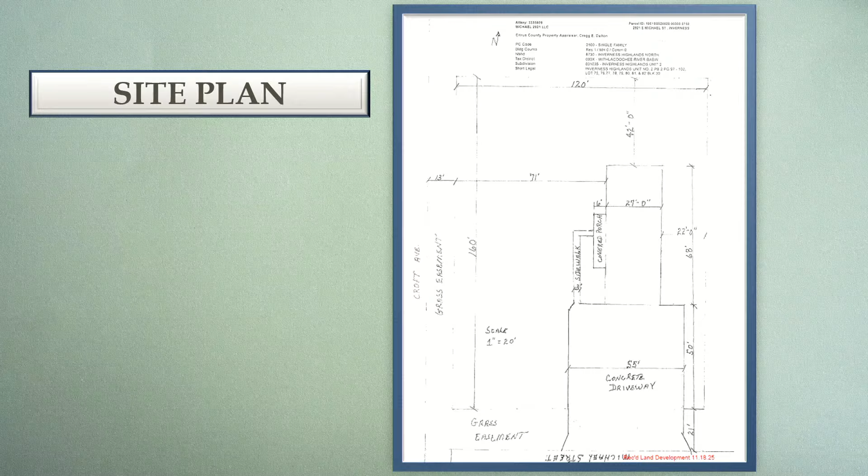So we asked technical services, our engineering, to comment on that, and it was their opinion that it is larger than that which is allowed, and they've offered information about the standard size and the allowance to go larger if there are stormwater compensations. The max they stated was 36 foot in the right-of-way apron for a driveway, and the last permitted driveway they know of was 12 foot. So there was an enlargement at some point in time. I believe the site plan shows a 55-foot driveway currently.

Okay, so staff's recommendation, technical staff recommendation, would be during a permitting process, a condition of a permit would be to reduce the apron width. Correct, that would be part of the site review. When this gets permitted, they're going to look at the site, things like landscaping, parking spaces, handicap spaces — all of that's part of that site review for the change of use.

And if it exists now, is there a reason to change it? If it exists now and wasn't permitted, then yes, there is a reason to change it. Got it, thank you. Any other questions from the board?

Yeah, Commissioner Chair, Mr. Barmes? Isn't this kind of untypical, to have a seller of a property come in and ask to change the status in order for him to sell it to an attorney's office or whatever? This is not the typical way that we do this, right?

I would say that it falls within the scope of the owner of the property positioning for an application to allow for a different use. It seems like they have a plan to sell it to an end user, and they're trying to stay above the sale and make sure it is sold with the allowable uses that are part of what they're trying to do there. But it is the owner that's here asking for the application, and I feel like that is appropriate.

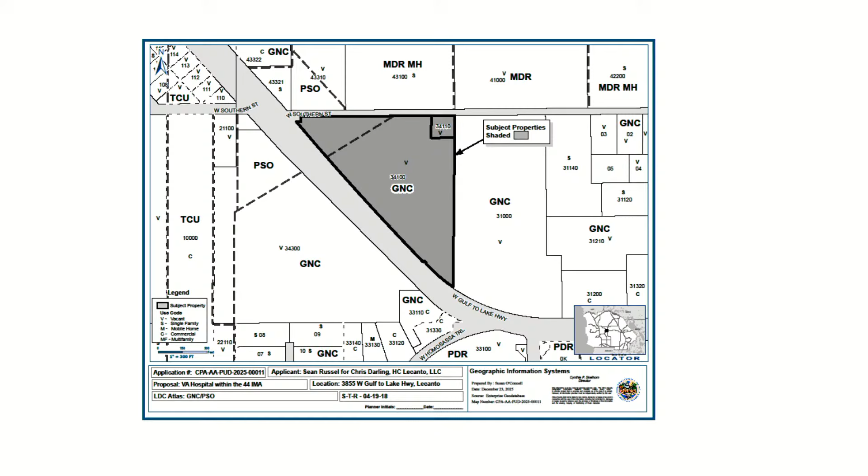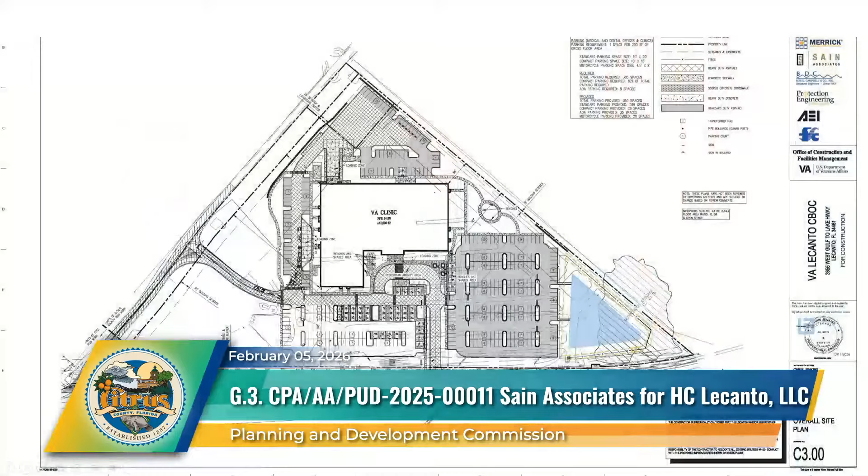I have a couple. So, have you guys ever tried to make a U-turn at the light at 44 and Homosassa Trail? Have you tried to make a U-turn yourself - let's say in a GMC truck - right at that intersection? I have. And did you make it without running up and over the curb? Oh yeah, yes sir. I go to that light constantly, I live within a mile of that area. I've watched a lot of people not make that curb. So when you tell me an 18-wheeler truck is going to make a U-turn right there, I almost want to laugh and fall out of my chair. I know that's not going to happen.

Well, FDOT would disagree with you. I 100% believe that, because FDOT does a lot of things I don't agree with - the mess they created at Crystal Oaks Boulevard and 589 and this whole entire area, it's a disaster. Well, we do know the parcel adjacent to us - we attempted to acquire property from them in order to have an entrance here. They would not go for it. It's a church on the property, they're not doing anything with it. We spent the better part of two years trying to convince them to sell it, or a portion of it. We even offered to put in the driveway and allow it for their use, and they refused. So when we permitted with FDOT, all we're doing is exactly what they asked us to do.

They asked us to do a traffic study on eastbound traffic, westbound traffic, the feeders, the daily trips, all those things, and they concluded what you see here is the plan that FDOT is planning to approve for that.

Yeah, I understand that, but I'm just here to tell you as a resident of this community that intersection is poor. And if you guys care about the veterans you are trying to bring into the facility, you really need to study, and I suggest you do something different with access, especially along the eastbound traveling on 44 right there, you will not get a U-turn and maybe one car at that particular light. It's just not wide enough.

And then as far as accessing off of the adjacent property, that kind of sounds like cross-access to me. If you're trying to purchase another piece of property or a portion of it, that's cross-access. So in my opinion, cross-access is important. I don't agree with the deviation. I won't vote in favor of it. You guys have a blank slate here that you can design. Cross-access doesn't mean that they're driving through your parking lot.

Cross-access just means at some point on that particular property, you need to provide access to the adjacent commercial properties. And I think it's very important in Citrus County right now because you can see the areas up in the Lecanto area. We've been pushing cross-access, not recently because mostly everybody understands it now, but 10 years ago, cross-access was highly contested in a heated debate. Now, people that drive around in this county who understand and utilize these cross-access ways understand how important they are. So I believe that you can design this 13 acre parcel, right?

I don't disagree with you, but we're between a rock and a hard place between what FDOT is dictating within their right-of-way and getting into this site physically. Y'all are telling us you want one thing, and FDOT is requiring something else, and we can't satisfy both of you. We've done the best we can adhering to their requirements by doing traffic studies, daily trips, number of patients seen, number of employees, when they arrive and depart. What you see here is a result of all those engineering studies.

What I think would be best would probably be signage. We need to try and create a situation where the least amount of U-turns for this property are created. We cannot expect a U-turn to be one of the main ways for people to come into that main access. That's very, very dangerous.

Would you do it at the risk of harming veterans parking in handicapped spaces trying to access this site? Keep in mind, as part of the VA requirement, the entire parking facility can only slope to a certain percentage to facilitate wheelchairs. So this site has been designed specifically. You won't see it like a Walmart or Costco with a huge topo difference, these dips up and down. This parking lot is almost flat all the way across, which will also allow folks to gain higher speeds.

I don't want to jeopardize the veterans using this facility to facilitate a cross access when we've got 1,200 feet up the road. They can just drive out on the major highway and make a turn. I think it's putting too many people at risk daily to achieve something that could be achieved out on the major thoroughfare in front of the facility. We're not talking about traveling miles to get cross access. This is a relatively small site when you're thinking about cross access. And when people do cross access, where are they going? Why would they turn and cut through all this parking to get out on this newly improved road when they could simply drive down the highway and turn without navigating through all of this?

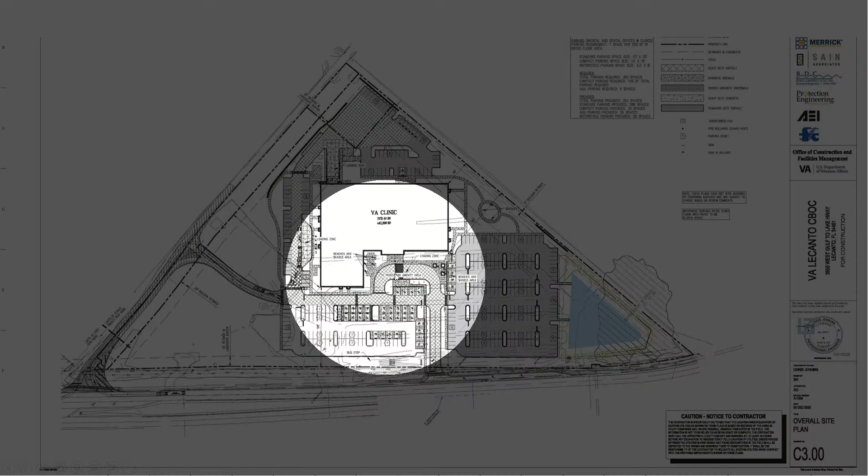I agree with that, and you've sold me on how much more important Southern Street is now, because I don't disagree with your comments about cross-access. That's a kind of a goofy spot to try to put one, with the wetlands and the retention area. I would not be a big fan of having people driving through to access when there's people in wheelchairs. I think those are very valid points, but it really highlights the importance of Southern Street in my mind. It really does. I don't think you're on the hook for that, but the county's going to have to address that somehow, some way.

Me personally, coming from my house, I'm coming down Southern Street to access that entrance. And when I go home, I'm leaving to go that way. If you think about the demographics of where a lot of veterans in this area come from, they're going to come that same way. They're going to find out it's going to be a highway coming through there. That's a concern for the county, not just me.

I would add to that, because of the road to the west and all the people coming from the Tampa region and the Tampa VA medical complex, they're going to learn very quickly to take the newly improved median cut that we're going to be installing onto Southern instead of going down and doing that U-turn.

One thing we did do was to give a right-of-way completely on our land, at a point in time, through our civil engineers. I believe it was a miscommunication with staff - we were unaware that there were also plans to take an additional, for future use, an additional amount of right-of-way on the other side of that road from the other property owners.

And trying to get all of the elevations that I'd mentioned on the parking, get everything as flat as possible. It doesn't look like it, but from a grading standpoint, it's very tight in this area and trying to get things graded back down. So we felt it was unfair for us to give all of the right-of-way for an improvement of the road when both sides of the road were going to be benefiting from it. But it's now our understanding from staff that if there is a future expansion or widening of this, there will be a remainder of the right-of-way taken from the other side of the road also.

One more quick thing. When you presented the plans to FDOT, was it your thought to do the U-turn, or was it their thought to do the U-turn at Homosassa Trail to access that center main access point?

As I recall from our engineers, they wanted to try to utilize both, but the U-turn down there was their obvious choice, and that's when they recommended to us that we do the traffic studies, the day trips, and all those things. And that's when they came back to us and said, you're going to have to modify this median cut up at the other end.

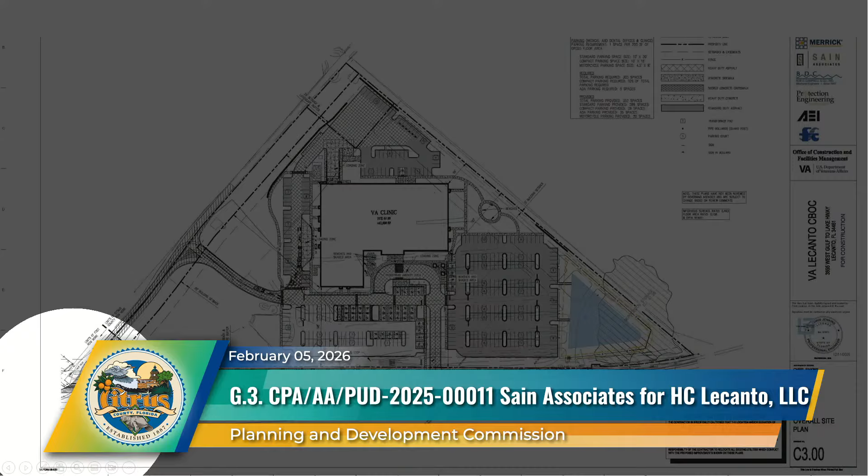Okay, well the one to the west seems fairly easy to eliminate. The one to the east, with a linked signal to the new signal at the southern entrance, takes care of all stacking problems and backing up in that interchange. It seems to me you guys need more political pull to solve that problem, because I don't think your solution on the U-turn at the east end of this major facility is very viable.

And we don't disagree with you - for some reason FDOT was concerned about the number of cars stacking westerly that would turn onto this street across the other side of the right-of-way there. We asked when we were in negotiations with them, can we just completely eliminate this curb cut? Can we just have a right-in, right-out as shown now? And can we introduce another curb cut here, a median cut that would align directly with that entrance? And we were told no.

We talked about all sorts of things with them to mitigate exactly what y'all are talking about here. And we have been bound, since all those negotiations occurred, to conform to what they have asked us to conform to in order to get the project permitted.

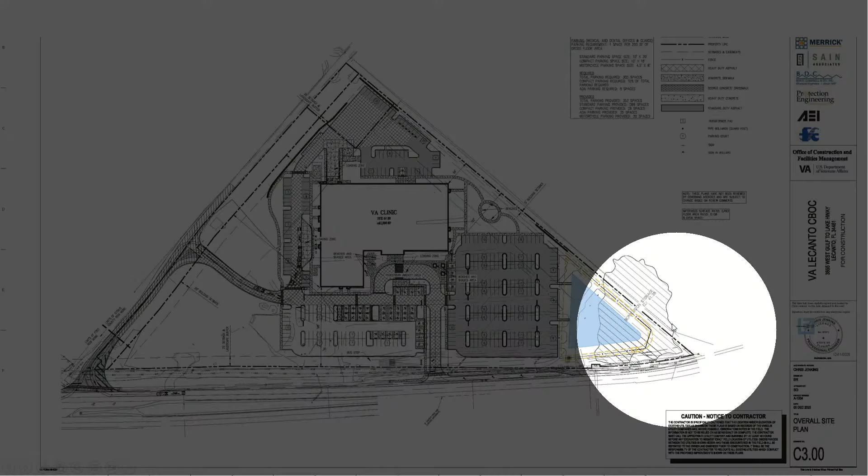We can't control when or how this other easement, this other access drive gets in, and I'm sorry for the miscommunication. I thought y'all were saying that we've got to install something now that'll get us in and out there.

No, providing a stub out. We can do a cross-access agreement, and then when they develop, stub it out in this area right here that would go right to the property line and stop, so if y'all would require them to, they could connect to in the future. They have to connect. We would require it, or they won't get a permit.

I think cross-access gets a little muddy because people think it always needs to be at the front of the property lines. It needs to be where it makes the most sense and where it makes cross-access the most accessible.

And that particular spot, if I understood, creates an almost perfect cross-access spot. Somebody's gonna park, they can pull in, the people that are there can pull out, there's a light. And it eliminates my concern about folks cutting through our parking lot, because it's not gonna be a straight shot route where they're trying to run right through where all the handicapped folks are parked.

But it does give us access back to that future driveway to the signalized intersection, and eliminates the U-turn that you're concerned about. Yes, sir. Perfect, I love it when a plan comes together.

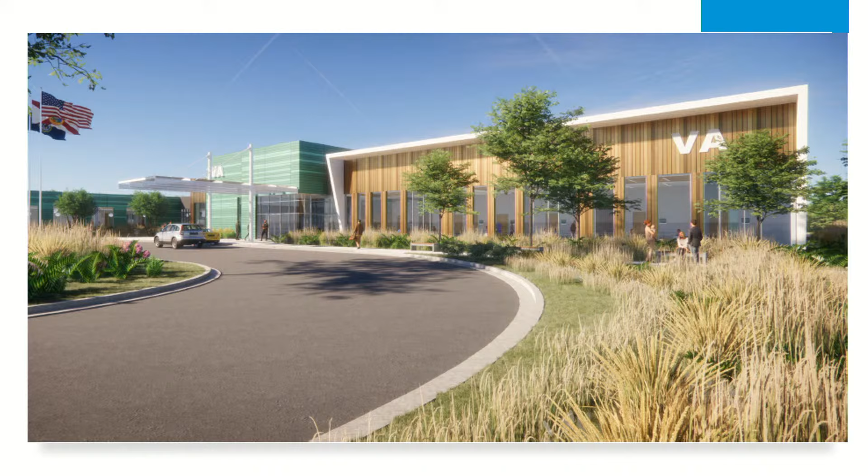And we'll get started. So this is the facade of the building. It is metal, but it's designed to not look like metal. I don't know if you had any questions on the facade, I can stop here. Yeah, if you can stop.

Right in that picture, I heard the applicant say it's going to be warm wood, and it doesn't appear warm wood in this picture. There's some great examples in their packet where it does look kind of warm wood, but this does not. So I think a clarification is needed instead of saying the condition can't be prefabricated metal panels.

We need to clarify this should look like wood and not like metal panels, which it looks like if you zoom in. I can't see it clearly here, but in my packet it looks like corrugated metal panels, and we just want to make sure that's clarified. He said warm wood, and according to Mr. Bozeman, that product can do that, so maybe just clarify the condition a little bit so it doesn't look like this picture.

That looks like wood to me. No, I'm not sure I understand. Sometimes it looks like wood, and then from a distance it looks like metal. It's just a clarification, okay? If it's going to be wood, great. Let's clarify it doesn't have a metallic appearance, and then we're good.

As a quick question, the report, I can't get my tablet open right now, but my notes say the report said no exposed metal allowed. And that's why I asked, in their presentation they said it's covered with a PVDF. I don't know exactly what that is. I'm assuming it's some type of polyvinyl chloride covering.

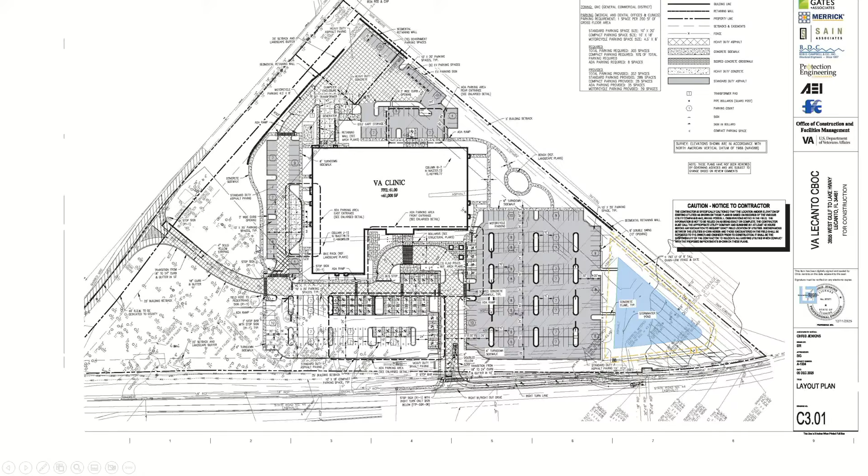Questions of the applicant for staff? From the applicant, questions from the applicant for the staff? Yeah, I had one. Please step to the mic.

I had one clarification, forgive me if I misunderstood, but in the suggested conditions, the application is recommended for approval under condition 4, stating cross-access will not be required. This deviation has been approved by the county's engineer. Was it actually approved as a deviation by the county engineer, or do y'all just take that under recommendation? The county engineer can't do that. The county engineer has no authority to waive the law, so he had no authority to approve waiving the requirement for cross-access. So condition 4 is incorrect.

So based on the comments, I think the condition should say cross-access must be provided to the east, which is okay per our code. That's the only question I had. Thank you.

Questions for staff from the board? Mr. Chair, Mr. Scherer, can you go back to your aerial photograph? I'm not going to go back over all the ground we've walked over, but just for clarification, there is a traffic signal at Homosassa Trail and 44, correct? And there is not another traffic signal from there up to the property. No, that's the only one near the property.

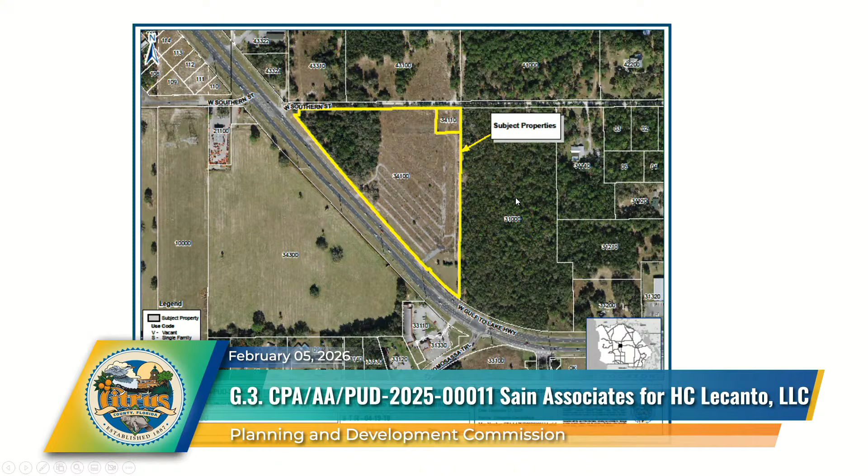When we were talking about the other parcel adjacent to this one, that's the wooded parcel right there, correct? Okay, is there already a provision that if you go through that traffic signal, there could also be a provision to go straight into that wooded property in the future? That would be a technical services question. I'm not comfortable answering, fair enough. I'm just trying to get my bearings. It would be a design decision up to them, they'd have to work with FDOT. Obviously if there's a traffic light, it makes sense to go straight in, but it depends on the design of whatever comes there, and how much frontage and how many entrances they have, compared to the other traffic light back down by the racetrack.

Well, it's one lot, but they could subdivide, who knows. What I was saying is there should be access, but they also have to meet the test for the previous light, and the required distance between traffic signals and what you can do. But maybe that's beyond my pay grade, there's a lot of requirements.

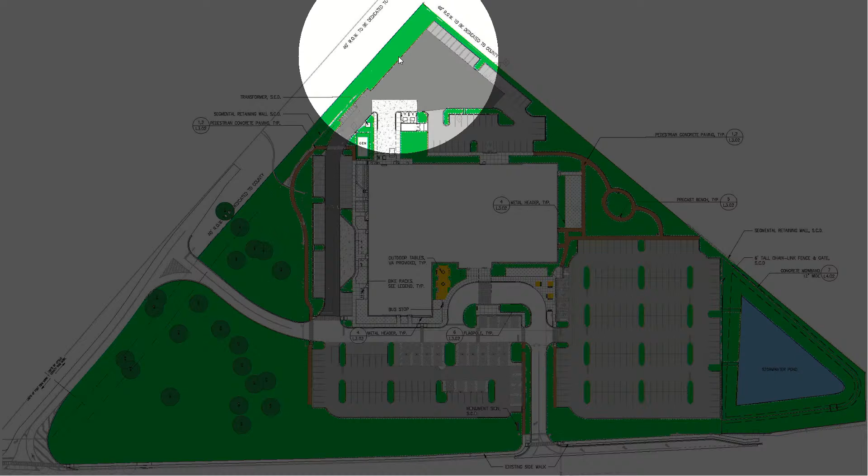All right, let me ask the other question. Keep going in your slide and show West Southern Street, please. This is a county road, correct? Correct. And the report says this county road has to be improved, or will be improved, as I recall reading. Yeah, Technical Services worked out with them to improve the road to a certain point. I'm not sure exactly what Tech Services worked out, I can show you. Right along here, they have taken a 40-foot right-of-way, so I know the road will be improved at least to their entrance, but there is a 40-foot right-of-way that they've given to the county to the end of their property line. Okay, they, in this case, is the applicant. Any idea what the width of that road would be?

Well, right now it's a lane, a path. Do you know how wide it is right now? You said they were adding 40 feet. They've taken a 40-foot easement from this property. Right, but how wide is Southern right now? We do not know, it might be in my staff report. It looks really narrow in the picture. Of course it does. So in this case, the applicant has offered 40 feet of right-of-way on the remainder of their property that could be used to potentially improve West Southern Street. Correct, that was the purpose. And then beyond that property, you get into other landowners. Do we have any idea what the width of the county right-of-way is to the north and east of their property? The county's not trying to widen Southern at this time, so they haven't gone in and taken anything there. So it would be whatever the width is right here, I don't think it gets wider farther down.

I think it continues this narrow, and unfortunately, Joe's trying to measure it now on the GIS, but it's approximately 40 feet wide right now. That's the right-of-way, existing. We're trying to make it wider and then improve it, but it's not being done right now. Clearly the conversation today is that if people can find a back way into something, they will find a back way. And like many roads in our county, it needs to be looked at and possibly improved upon.